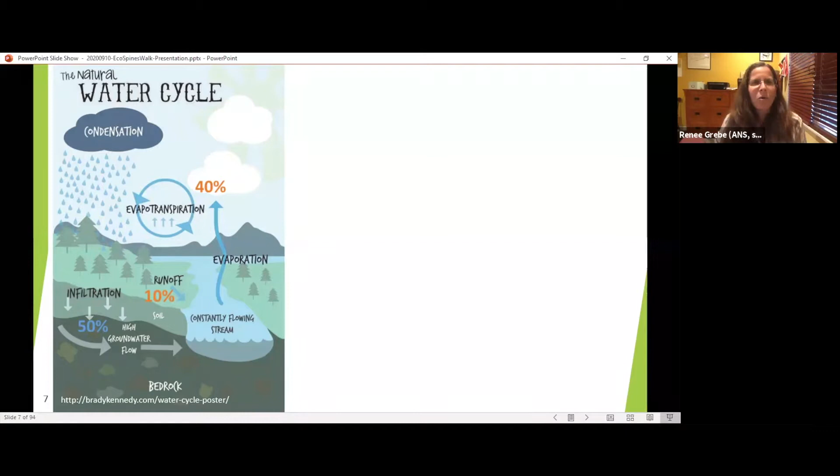So we'll dive right into why are we here. So when we think about where our water comes from, it's really interesting. Water really is what life is on our planet. And the water cycle here on the left really demonstrates how our water is recycled in our world. The land and water and air are all connected. The trees and natural vegetation prevent erosion and trap and filter that water to make it cleaner.

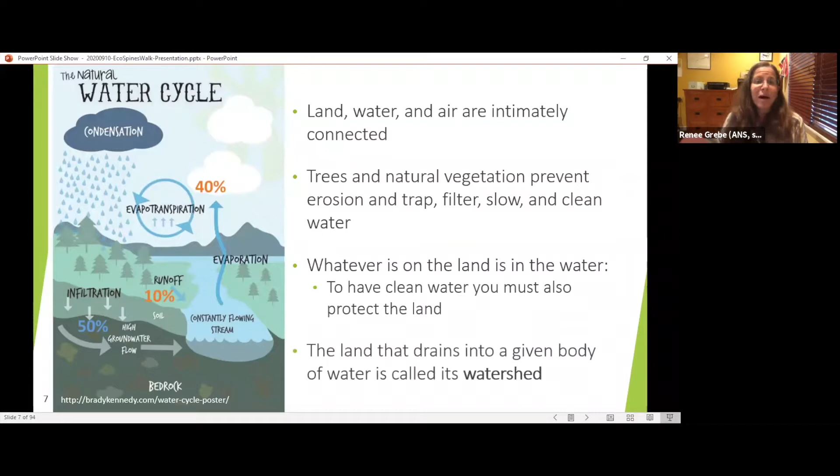And really whatever's on the land is in the water. So you have to have your protected lands in order to have really clean water. And then the land drains into a given body of water. That's called a watershed, and Charles will go into that in a little bit more detail. So we ourselves are made up of 60% water, and whatever's in the water is in us. So when our watersheds are healthier, our drinking water is healthier, and our communities are healthier.

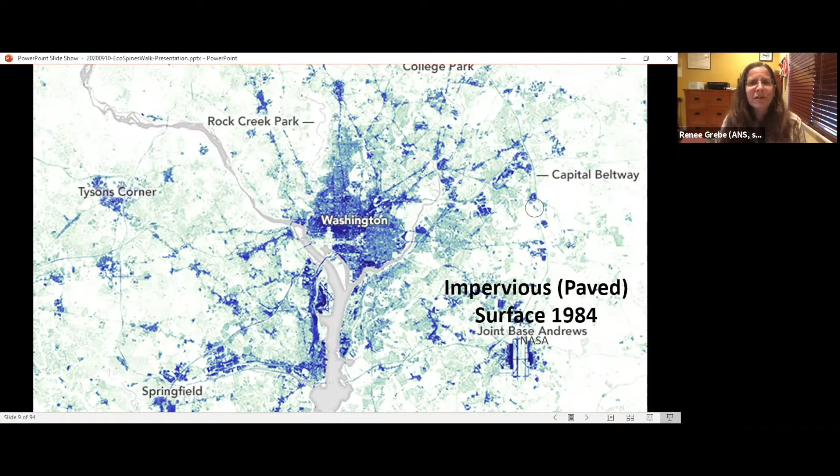When you think about where our water comes from today in urbanized areas, we have these two pictures, the impervious surface back in 1984 and the impervious surface in 2010. And I'll just flip back and forth between these two so you can see the difference in impervious surface. And you can see when we develop our land, like you can see up in the top right-hand corner, we have water runoff and stormwater issues.

I don't know how many of you got big storms today, but here in Alexandria, we got almost 3 inches of rain in about an hour's time. It was really impressive. So it's a good day to have a stormwater talk.

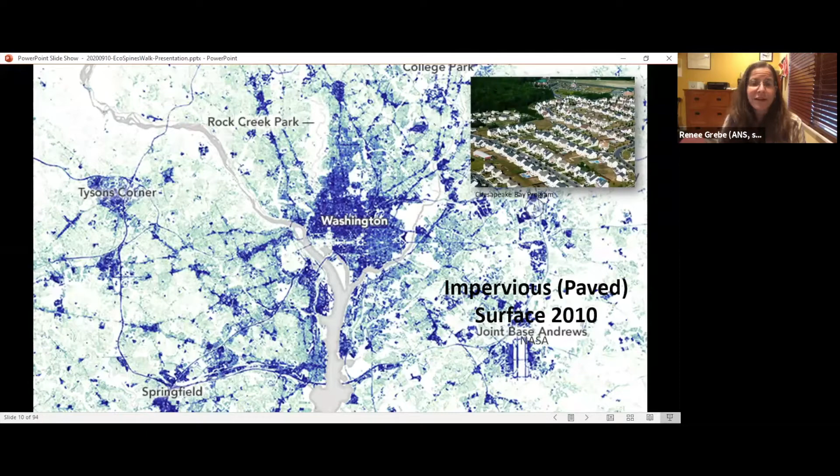So besides water, what else gets washed into streams? All of the things on our land go into our water. So the salt we put down in the winter, the fertilizers on our lawns, the dog waste that maybe people forget to pick up, chemicals, trash. And what does that mean?

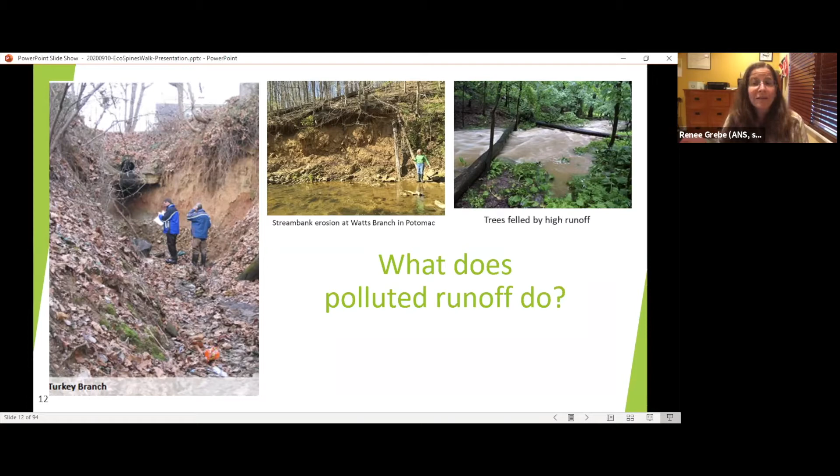When all this polluted runoff goes into our streams, where does it go? It goes into our water sources, our drinking water sources. It scours out some of our streams at extreme forces, like when we get these 3-inch rainstorms in an hour, and it can fell trees along the watershed. So how can smart growth redevelopment help? I'll hand it over to Sonia to explain what smart growth is.

Great, thanks, Renee. So well-designed, compact, mixed-use development that is walkable, bikeable, and linked to transit are key components to smart growth. The Embark Richmond Highway plan envisions just that, with bus rapid transit connecting the Huntington Metro Station to Fort Belvoir and improved bicycle and pedestrian connections throughout the corridor.

Not only does this type of redevelopment help us meet the needs of our growing region with more housing near transit, it provides an opportunity to transform sprawling, impervious parking lots and shopping centers into something more sustainable and healthy. As these aging commercial corridors are redeveloped, they're built with updated stormwater controls, and in some cases add management controls where there are currently none at all.

Additionally, the Embark plan provides opportunities to create access to open space, parks, and trails that are currently lacking in the corridor, and will help reconnect communities to the outdoors. This encourages healthier lifestyles with more opportunities for outdoor recreation and exercise. And with this renewed access to nature, it can help to create new generations of environmental stewards. Okay, next, JoAnne.

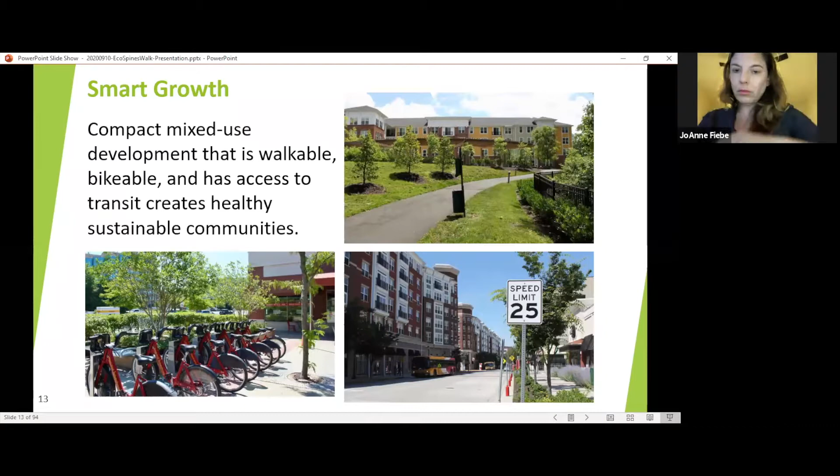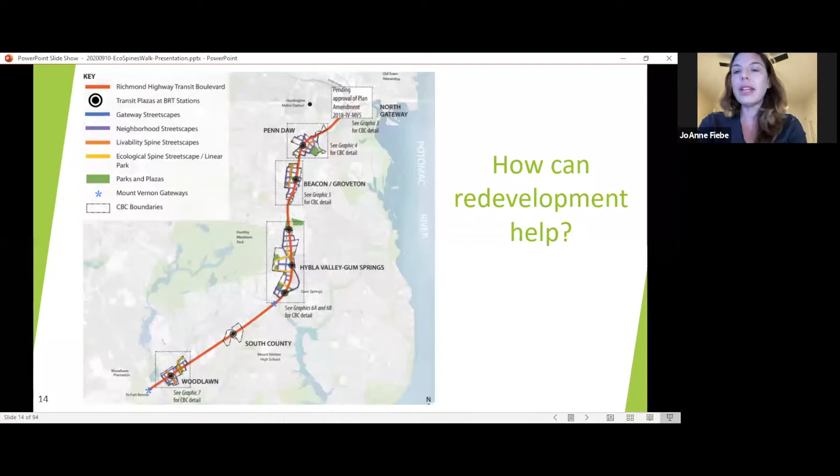Hi, so I hope that many of you are familiar with the Embark Richmond Highway plan, but it was a 2-year planning process to really think about the future of Richmond Highway and establish a new vision that focused on a lot of the elements that Sonia was speaking about. It was finished in 2018, so it utilized these smart growth principles to create a series of transit-oriented activity centers around these planned bus rapid transit stations.

So this is a map of the Embark area from North Gateway up by Interstate 495, and it goes all the way down to Woodlawn and right at the edge of Fort Belvoir. So you can see each of these black dots represents a BRT station. And so the idea is that there is a lot of energy and activity centers around these transit stations to concentrate that activity and to create these walkable environments.

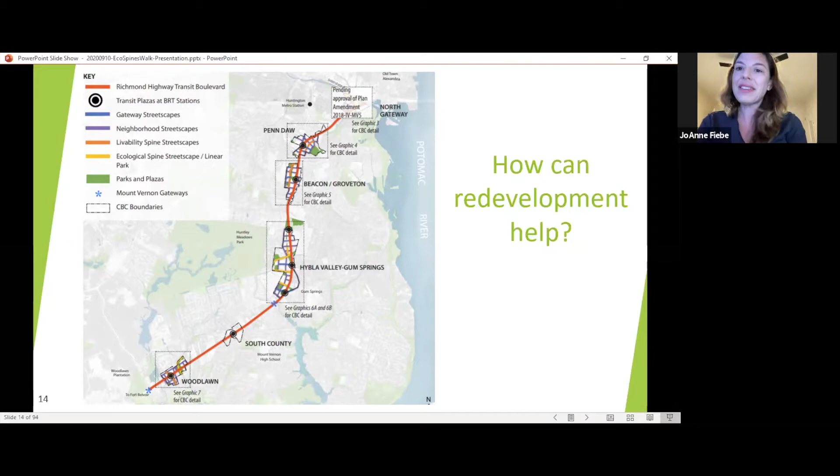So these little lines around the stations are the new grids of streets that connect communities into the BRT stations. So sometimes we call this a sort of string of pearls. Next slide. And this is the Beacon Groveton Community Business Center, which is an example of one of those transit-oriented activity centers. We call them community business centers.

But this is showing the current Beacon Mall on the left in that existing photo, and then how it will be transformed from an auto-dominated, mostly surface parking lot into a much more productive and healthy community by breaking down this large, massive shopping center into a series of more walkable blocks, and working with the existing street network, but augmenting it to create these communities.

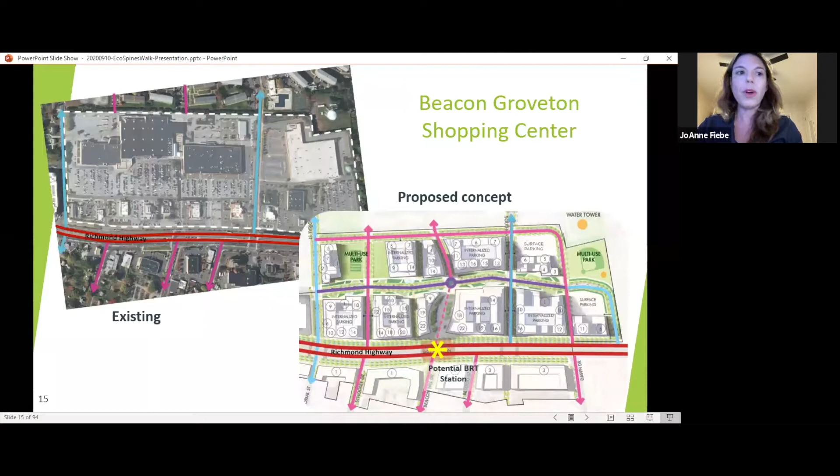And then it allows for opportunities for open space and for bike facilities and better mixed-use developments. And by doing this, we are able to concentrate growth in our activity centers in order to minimize pressure on the surrounding communities and open space, which helps support a lot of these ideas that we're going to talk about with stormwater. Go to the next slide.

And a good example of this, if you've all been to the Mosaic District at this point, is a similar idea that happened there, where they took an old movie theater and a large parking lot and transformed that with new streets and a mix of uses with a lot of new residences. So it's a good parallel.

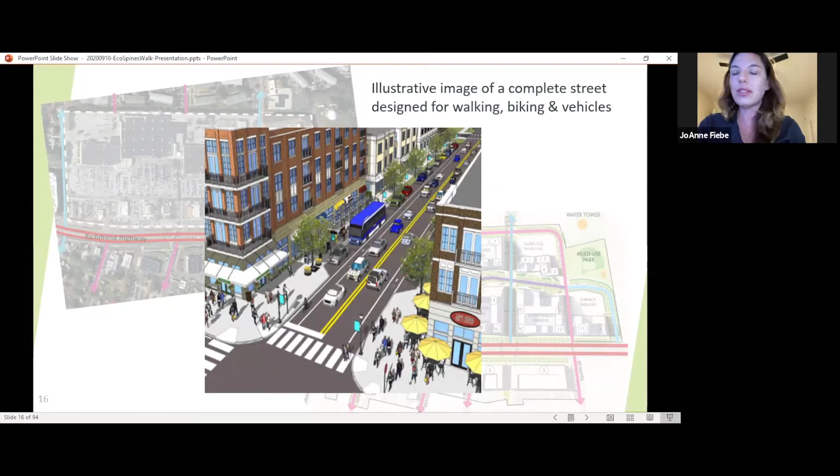This is just showing an example of the types of streets that we're hoping to create that are more walkable, bikeable, and bring buildings to the street edge to create that community experience. I'm good there.

Excellent. So what is a watershed? We'll hand it over to Charles. Okay. Thank you, JoAnne. So as JoAnne mentioned before, a watershed is an area that drains to a certain point. So if you picture a bathtub, that's pretty much what a watershed looks like. It has a drain at the end or a flow point, and it's all the land area that drains to that point. So whatever falls in that watershed often determines the condition, and of course what's built in that watershed determines the condition.

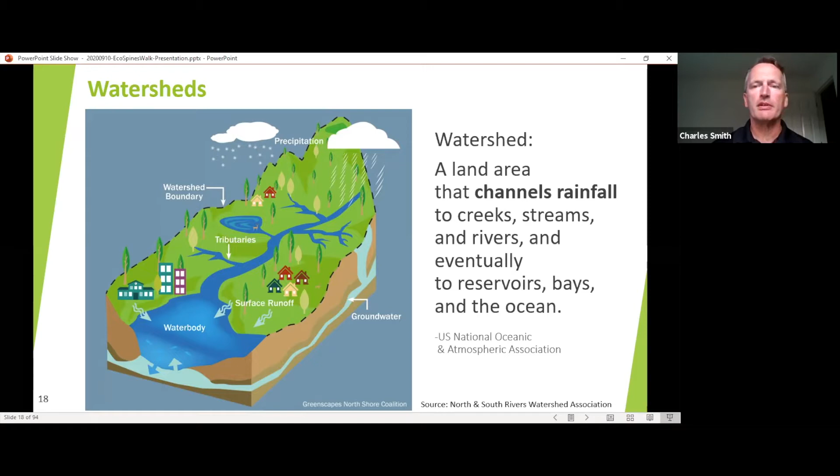So what's most important within the watershed is really what's been done with the land. If you have an undeveloped watershed, the thing to remember is that water can soak in. The natural vegetation can soak the water up, slow it down, recharge groundwater, and provide a clean, cold base flow to the streams. The water doesn't move quickly through that system. Plus, that water is available for the native vegetation and all the organisms that depend upon it.

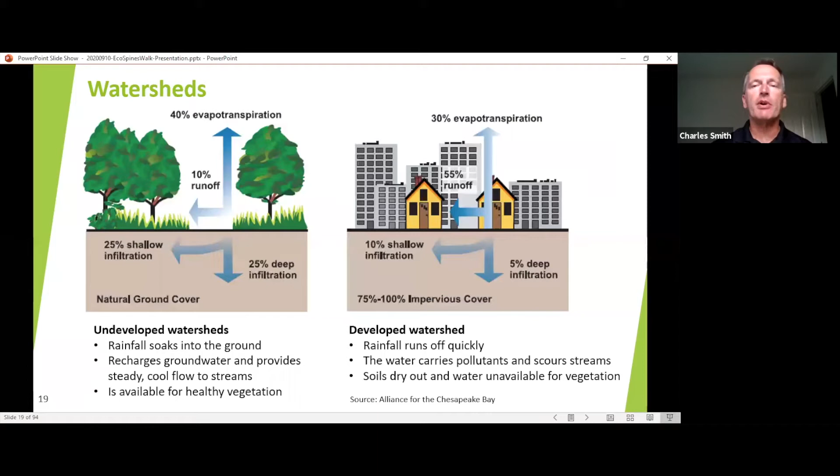But as soon as you begin to develop the watershed, as little as 5% imperviousness can begin to alter the receiving streams, and the more developed the area, the less water that's conserved. It flushes off very quickly. It's hot, it's dirty, and it also can erode the streams. And it's not available for the vegetation and the animals that need it. As JoAnne already mentioned, the pollutants that come with this runoff are pretty significant, and they increase with the types of land uses from residential to commercial, and that can have a big impact on the quality of the water.

So the thing that's really important, and I think the ecospines concept is really building upon this, is buffers. Because what we do know is that buffers provide tremendous benefits. Not only do they protect the banks of the stream and prevent erosion, but they also capture the pollutants and control flooding. Traditionally floodplains are along lower gradient streams. Those are streams that are more in the bottomlands off the hillsides, and they usually have floodplains where that water can spread out and slow down. There's also a lot of wildlife habitat, air quality, and quality of life benefits for humans.

And I think restoring those buffers provides many restored benefits, which we can really gain from, especially in the district we're talking about. One real quick thing too: 35-foot buffers are the minimum buffers usually required for RPAs, or resource protection areas, near streams in Virginia. 100-foot buffers are preferred, but recent research has shown that buffers that are 55 meters, or about 180 feet, are actually the most useful buffers from a resource and ecosystem function perspective.

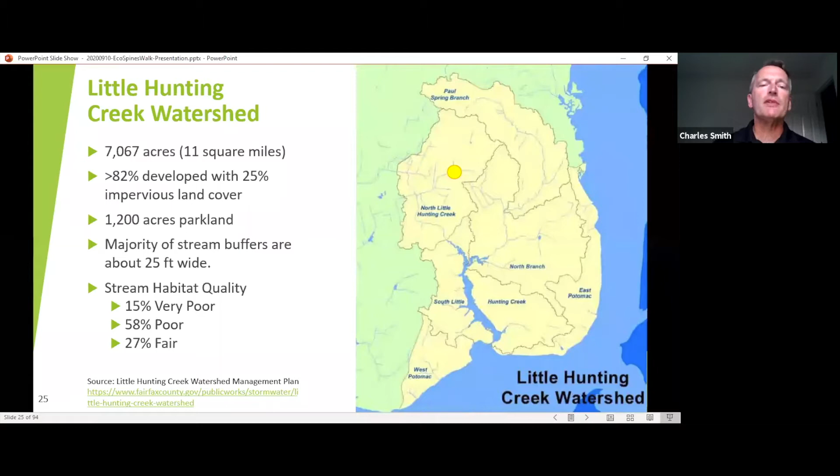So you can see the statistics on the watershed in terms of the area it drains. And then it is very developed, so about 25% imperviousness on the land cover on average. And that's significant because of a lot of runoff. And then those buffers are only about 25 feet wide, so that's also a significant issue, having very narrow buffers. And you can see that the vast majority of the streams in this region are fair to very poor because of that runoff primarily.

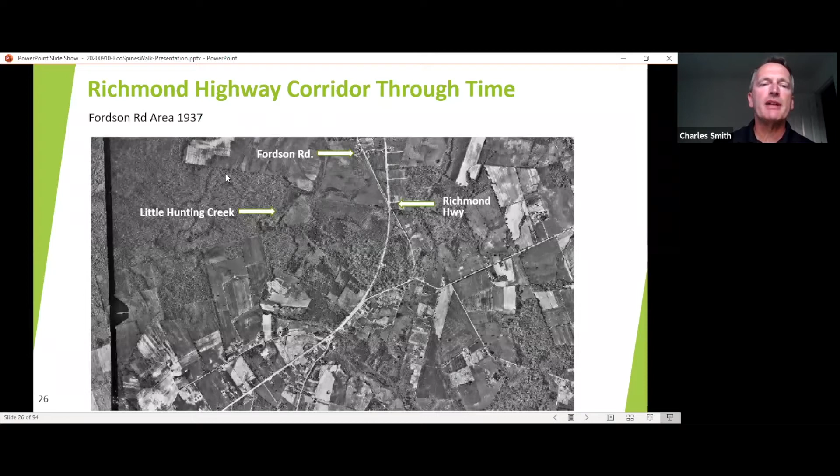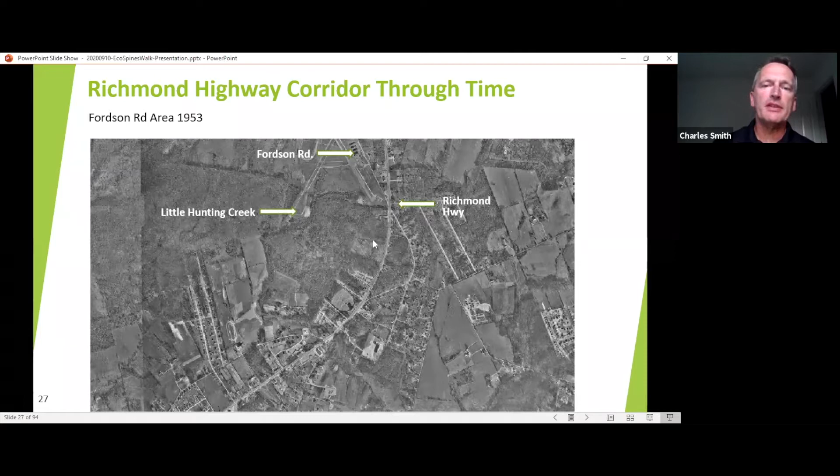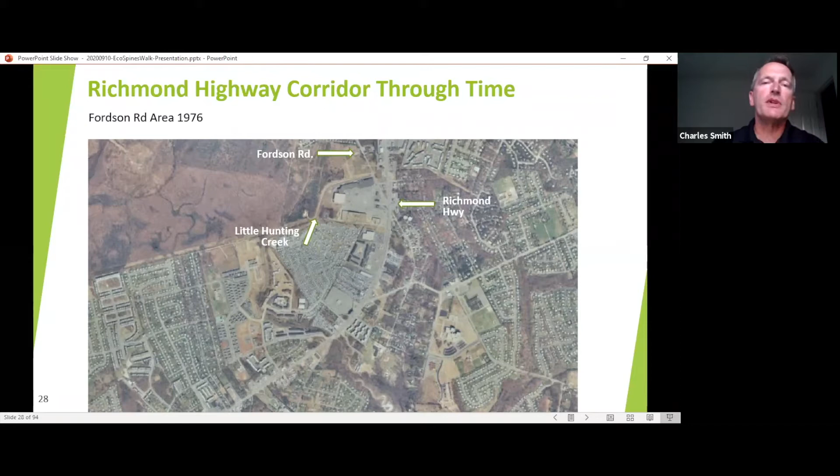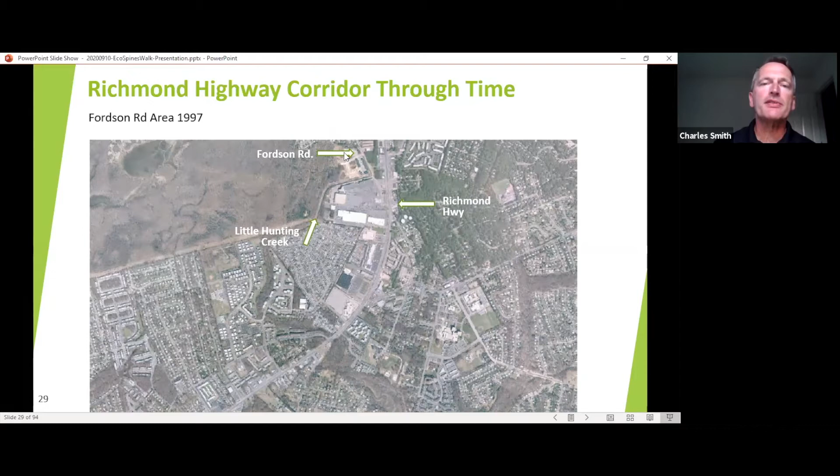So we lost our bed and bank stream. We went to a concrete ditch system. So this was in the era when stormwater was treated just to get rid of it. We basically wanted to get it off the land as quickly as possible. And then there's not a lot of change between 1976 and 1997. You have mostly build out. You can see the townhouses here at Fordson next to Mount Vernon Plaza under construction.

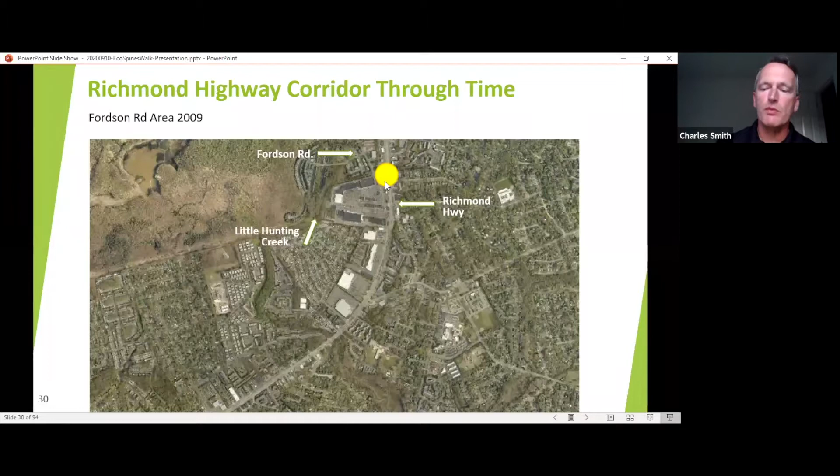And then by 2009, we've reached the final build out for what we see today in terms of the land cover area. You can still see Little Hunting Creek snaking around through here and then coming out down on this lower portion around Route 1. And then today we'll be talking about this area right here. Little Hunting Creek comes across Fordson from Route 1. That's going to be a focal point for our discussions. And there's a close-up of that.

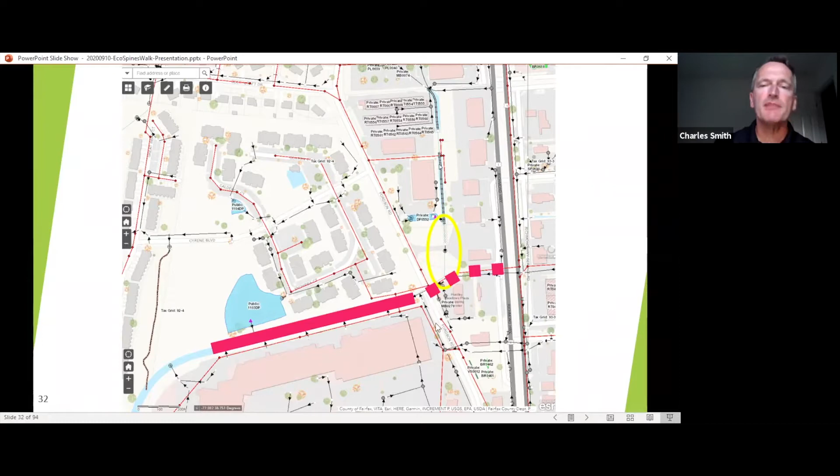And then you can see here the infrastructure. So this is the sewer system, the sanitary sewer system. This is one of the only ponds in this drainage area. So it's taking the water from this townhouse complex and leading up to the stream. But you can kind of see the infrastructure is pretty intensive around the stream itself.

And the last image I'm going to talk about right now is the resource protection area. So in Fairfax County, we have a Chesapeake Bay ordinance. So we have resource protection areas around all perennial streams. Those resource protection areas are 100 feet wide, or in a major floodplain, the limits of the floodplain itself, which could be much wider than 100 feet. And major floodplains are areas that have drainage of 360 acres or greater.

So this is just a quick snapshot showing that if this was not a developed area, you would not be able to build in these areas that are now hatched today. So development in the Route 1 corridor would look vastly different if the Chesapeake Bay Ordinance had existed back in the 50s to 70s when all this stuff happened.

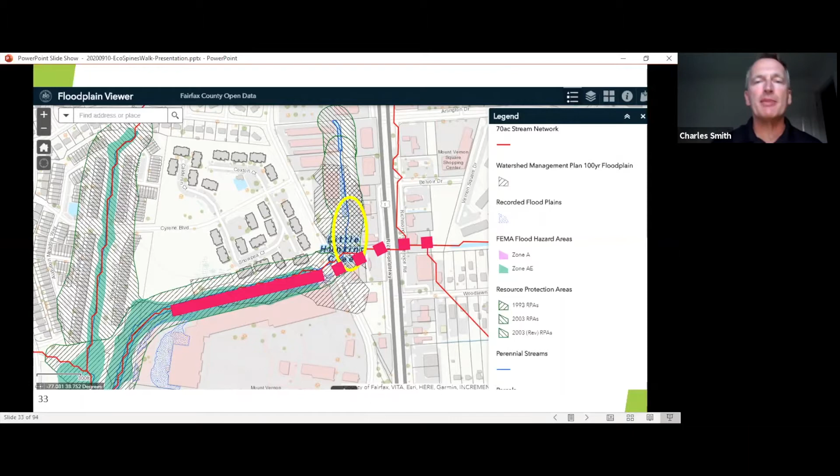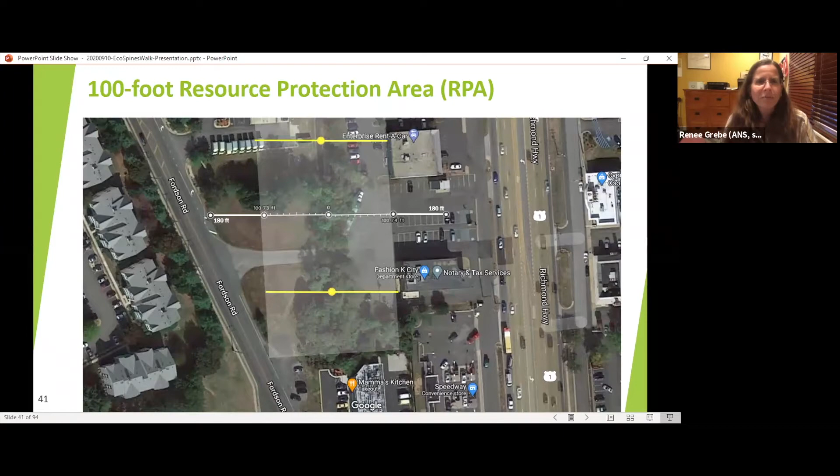In Google Maps, measuring the distance of the crowns of the trees there, it's about 70 foot or so, a little bit more narrow at points. That's not the spread of the creek, obviously, but it's the spread of the crowns of the trees there. We're standing 100 feet off of the stream bank right here at the edge of the RPA that would be planned. And here's a video of them standing and showing how far away that 100-foot buffer really was.

And thinking about it from the other side, from the parking lot side, we'll take a look from there as well. So we're here in between Fordson and Route 1, which we're looking at. And we have Charles, who has paced off the 100-foot marker of the resource protection area. So you can see that in today's development, it's a big impervious surface, and there where the trees are is the stream.

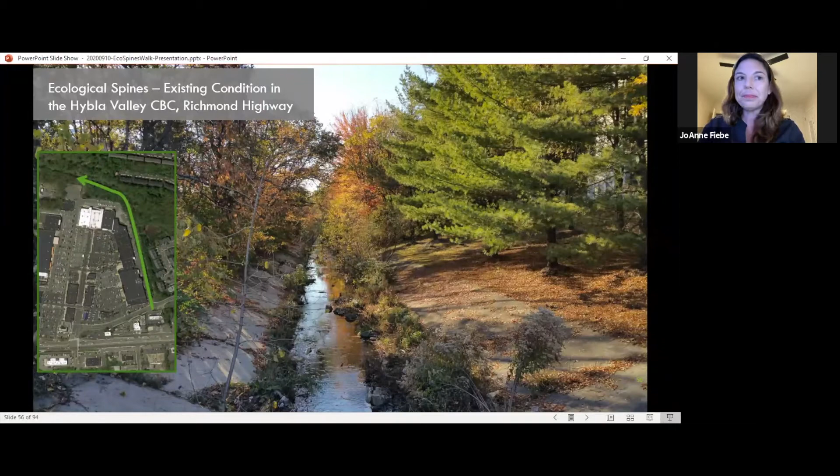You can go to the next slide.

Just to define what we're talking about, because it's kind of a wonky term, Fairfax County has completed a lot of restoration projects around the county in Tysons, in McLean, and even a portion of Dogue Creek near Hayfield and Telegraph Road. But ecological spines take this idea a step further by combining stream improvements with a new community amenity. We hope this idea maybe starts on Richmond Highway but can be used as inspiration elsewhere. So to define them, ecological spines are linear parks and enhanced riparian corridors where there are already existing streams, formed by daylighting buried streams or enhancing existing open swales. They serve a range of environmental, recreational, and educational purposes while connecting people to nature. The key to these is restoring a connected ecological system.

You can go to the next slide.

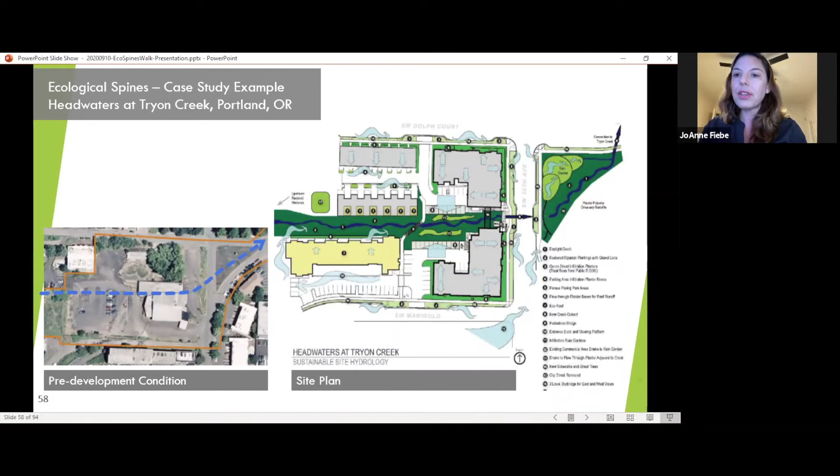What we're going to get in the reality of developing in these areas is that when you saw how wide that buffer was, it took up the entire block almost. There was really very little to develop. So it's highly unrealistic to expect that 100-foot buffer.

In fact, the Chesapeake Bay opens the door to looking at how, where development has already occurred, you can continue to develop in those areas. So what we're looking at is how can we allow development to occur within that buffer, but also do it in a way that's restoring some ecological function.

This is an example of that sort of very constrained cross-section of an ecological spine, where it's still quite narrow and buildings are pretty close to the waterway. But restoring those banks and creating riparian corridors along them, you can restore some of that environmental function, and sometimes some stormwater benefit as well.

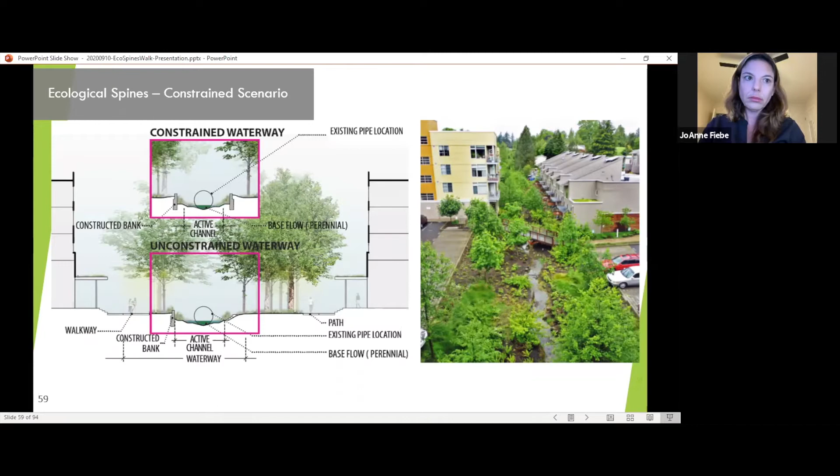So your paths would actually be part of a floodplain. During higher flow events, those would be underwater and not usable all the time. That's important because you have to give that flood an opportunity to spread out and slow down, and that gives better flood control and better cleaning of that water during higher flow events.

This shows an example of when you have the opportunity to gain some more space and it's a little less constrained—what can you do there? As Charles was mentioning about the banks, the entire waterway area is much wider here and allows the water to spread out even further. It really just depends on the specific conditions of each ecological spine and understanding what can be achieved.

But all of the amenities that go alongside these, you can see as an example in the photo on the right—not only are we restoring that floodplain function and these natural banks, but we're adding things like trails and opportunities for people to connect with that waterway.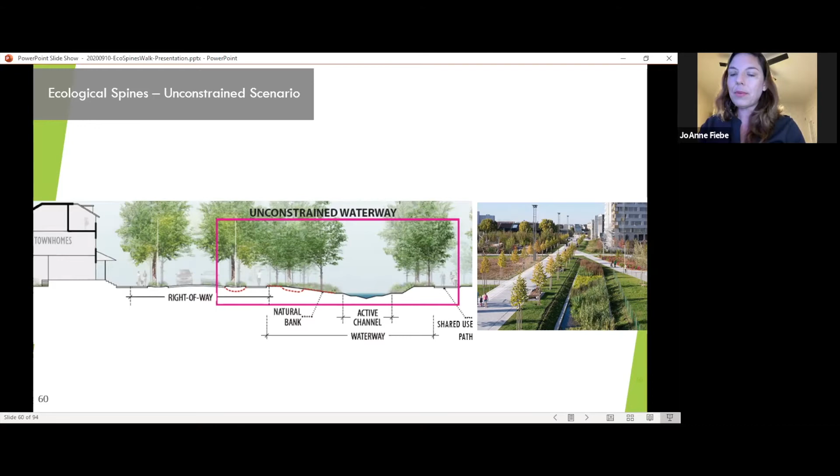This might be an example of a completely naturalized scenario. An example might be up by Cameron Run, all the way up in North Gateway, where Cameron Run is fairly wide, and there are opportunities to restore a lot of that natural bank along that edge.

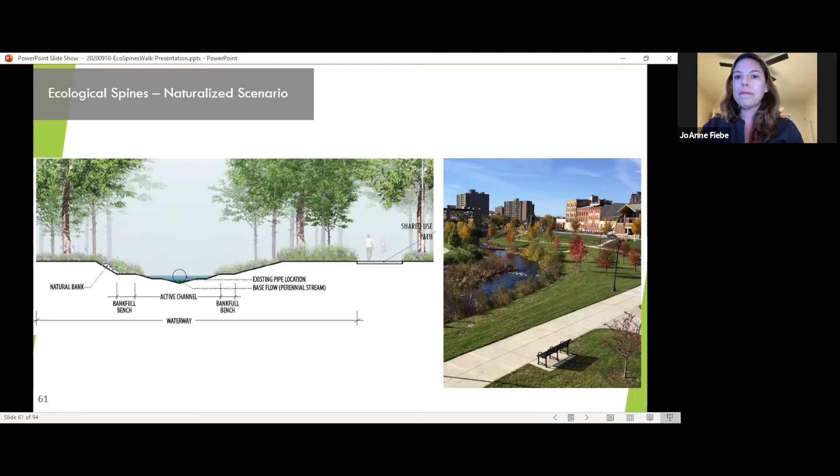These would be much wider and restore a lot more floodplain function, with maybe much more naturalized experiences where there could be trails and things in there, but less programming, less intense—looking especially at the waterway's edge and how to restore that natural edge.

These show some examples of other ecological spine type projects around the country where they've created different experiences along these—things like ways to get down and touch the water. We were looking out when we were walking by the Hybla Valley Shopping Center, and in that space behind it there were children playing back there.

You could imagine right now, with the high banks and concrete channels, parents would say stay away from that. It would be really nice if kids could actually engage with the water—maybe they bring their fishing nets and things like that. This is all about creating those amenities.

We've done a lot of research work on how to implement these types of ecological spines, and we're going to continue to do that. We've developed a technical team of staff from everywhere from the planning side to stormwater experts to landscape architects to look at the different aspects of what's needed to design these.

But as I mentioned earlier, the need for a public-private partnership and some financial or technical support, as the Portland example illustrates, is going to probably be needed as well. And then there's important practical questions about how to daylight and restore streams that might have upstream or downstream impacts outside the boundaries of the site. So when you have one developer developing a section of an ecological spine, what does that do for upstream and downstream impacts? That's something the county is going to also have to participate in better understanding.

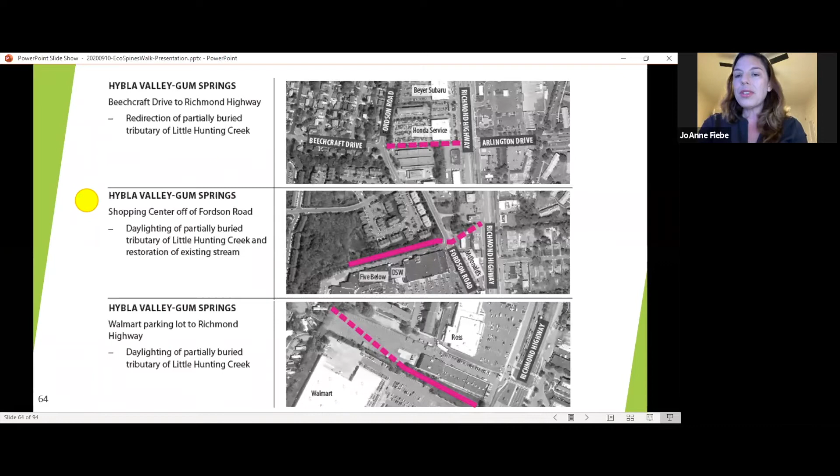This just shows a map of a few of the other locations besides the one we were talking about. As Charles was showing some of the other locations around Little Hunting Creek where it comes off, you can see that in all three of these examples. But in addition to these, we look at portions of Dogue Creek and portions of Cameron Run that have these same opportunities.

While we were out walking and taking some of these videos, Mama's Kitchen, that's right there on Fordson.

This is right at where we were initially looking at the full 100 feet of the RPA, and the stream comes down and then goes down under Fordson, and right there is where Mama's Kitchen is.

What's amazing here is, and what we want to talk a little bit about, is placemaking, where you really are able to utilize the local community's assets to create a sense of place with gathering areas that highlight the history or natural history of the area, providing opportunities for passive recreation that JoAnne was sharing. That basically helps to promote well-being and interest for the people who live, work, and play in this area.

The owners of this plaza utilized an undevelopable part of the property right next to the stream and created this gorgeous garden, growing fruits and vegetables that they use in the restaurant, providing a beautiful outdoor seating area just steps from the hustle and bustle of Richmond Highway. You wouldn't even know you were near the highway when you were in there. It was really quite remarkable. We were just amazed by what you can create when you start thinking about how can we create a sense of place here.

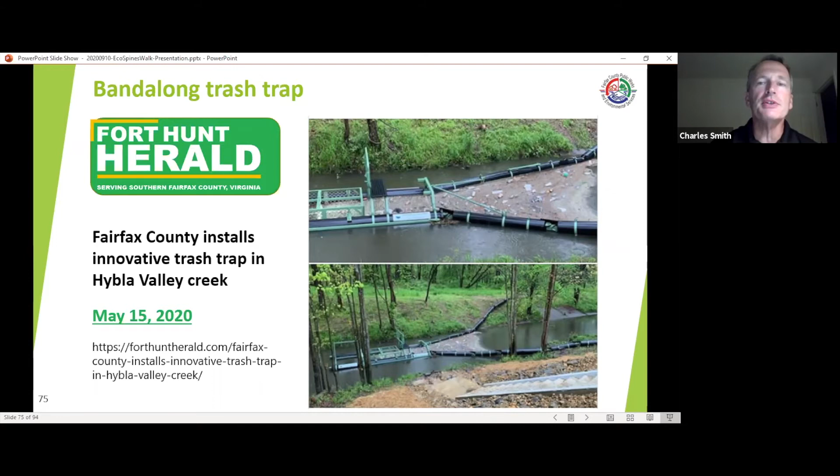Some of the things we're trying to do in the interim in this space - the county really tries to work closely with the Department of Planning and Development, JoAnne's group, and others to help plan the Richmond corridor improvements. But in the interim, since we don't have control of much of the land, we're trying to do some things to help the corridor. So this Bandalong trash collector is one effort, and we've had this in place since May. They exist in DC and also in Arlington County, so they're not new to the region, but it's a unique way to try to find a way to control trash.

It's located right here at the end of the concrete ditch that flows off of Fordson behind the area with the Home Depot. There's a picture of the end of the concrete ditch, and then it's anchored up on the banks. This is further along down Little Hunting Creek behind the Home Depot.

I'll let this one play first, two quick videos back to back here. Sorry, they're somehow getting out of order, one moment here.

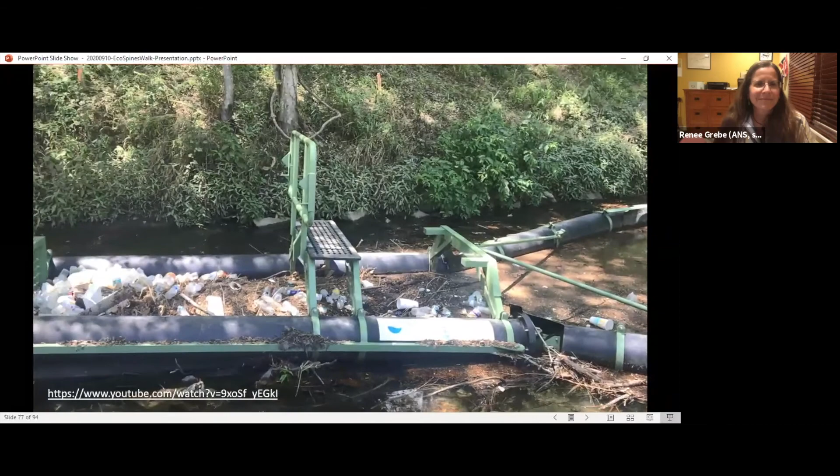This is further along down Little Hunting Creek behind the Home Depot along Route 1, where a new Bandalong trash collection system is here to try to minimize the trash pollution going into the Potomac River and downstream of Little Hunting Creek.

So this is further along down Little Hunting. This is just downstream of the Bandalong on Little Hunting Creek. And you can see how much less trash we have here. And you can see the Bandalong is right here. Great.

This is just downstream of the Bandalong on Little Hunting Creek. So the Bandalong is a unique opportunity to try to capture trash. I will throw in here right now, the Bandalong is not the end all and the be all. It is a good effort, but you've got folks like the Friends of Little Hunting Creek and the volunteers who have put in probably thousands of hours over the years, pulling out incredible quantities of trash from that stream. And so we're trying to reduce that load, but certainly the efforts of many people over many years have done a lot.

We have a lot to do with behavioral changes that will really help in terms of the trash issues also. One of the other efforts we've been undertaking in the last year is Operation Stream Shield. So this is an effort to try to take folks who are underemployed and help them. We'll do 2 things: help our environment, but also potentially give them experience and skill sets that might help them get employed. And as of May this year, they had removed over 17 tons of trash from our county streams. And they're also now controlling invasive species mostly on county land as part of stormwater projects and other projects.

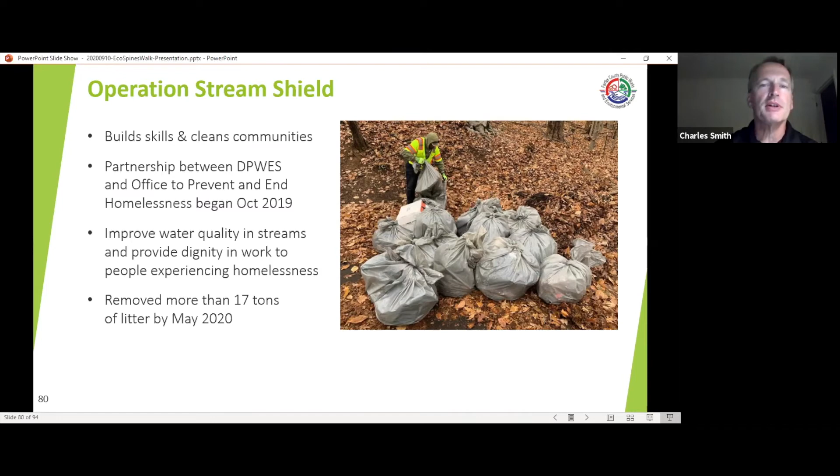And then some other things we do is I mentioned in the slide previously that there are over 6,000 stormwater facilities in the county. It's actually closer to 7,000, I think now, or 6,500. And a significant percentage of those are privately maintained. So the county has to inspect them once every 5 years, make sure they're functioning properly. And then if they're not, they issue a corrective action notice so that the owners are responsible for doing it. So a lot of those are maintained by private contractors. So we provide training to those contractors, and we have these fact sheets which allow them to better understand what is required to maintain the facility.

Another thing for all residents is that we do have a service request, both a number and a web page, where if there's an issue that you see, you can report it to us. We'll send our staff out to take a look at it. We'll try to take corrective action. We also have places to tell you how to get in contact with VDOT if it's more of a problem with a road right of way.

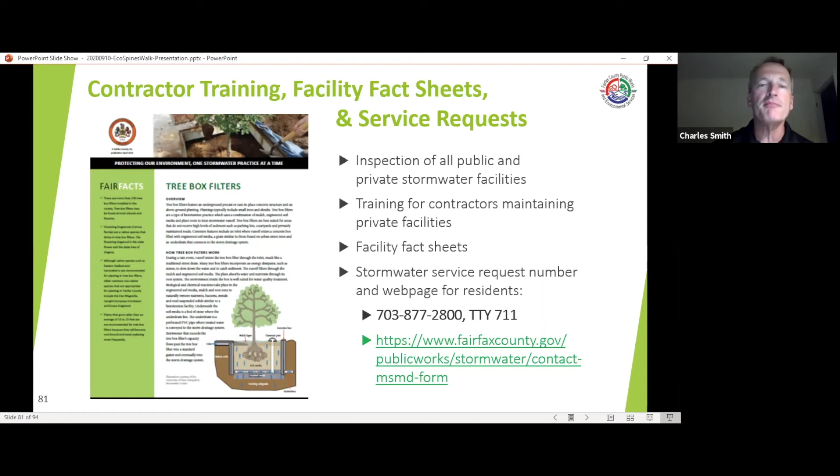Yeah, so Charles, let me add to some of this. This is a very interesting project. So when we started getting involved in the VDOT and county's widening project that's underway right now, as well as the new bus rapid transit project, and when we saw all of the stormwater facilities that were being planned, we said, boy, we have this ecological spine concept where we're saying we want to take existing stormwater facilities and turn them into community amenities while having better environmental functions. Could we not do the same for these stormwater ponds? And if you just flip back to the previous picture for a second, we looked at,

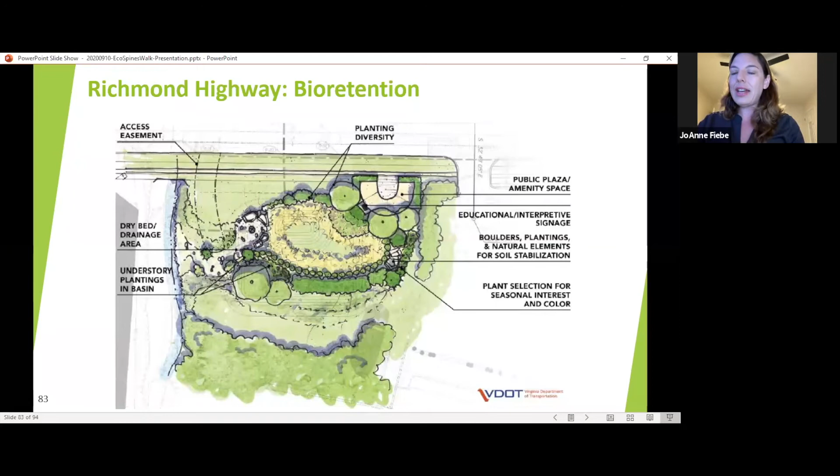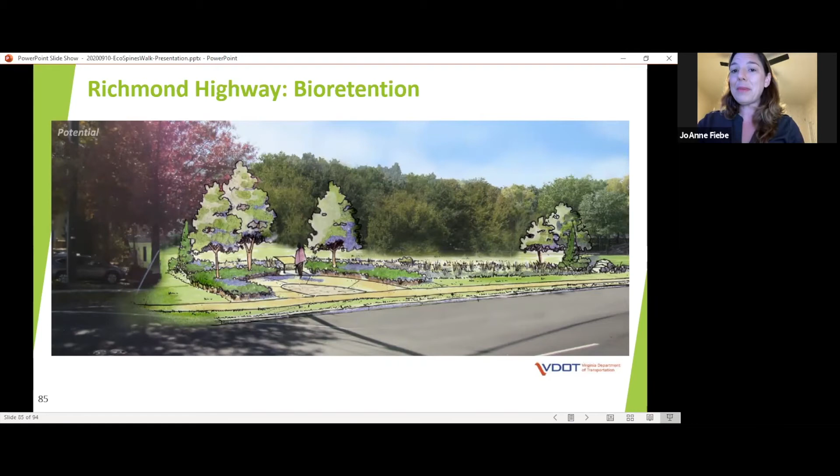So the next slide was showcasing where one of these ponds would be located. So you can envision, right, that's a perspective view of that pond from the highway and how it could be transformed. So there's two different types of ponds in the Richmond Highway Corridor. I call them ponds, but they're all stormwater facilities. One is a bioretention that doesn't hold water typically. It will collect the water and then drain away, usually, I believe, Charles, you can correct me, a couple days typically, if not sooner. Maybe a day; rain like today, it might take a little bit more time. And then the next slide.

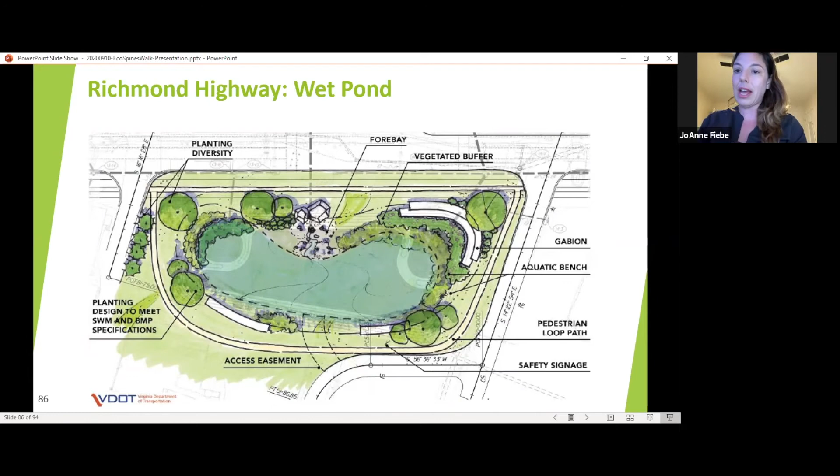So this example of a wet pond, there's only a couple of these as part of the VDOT project. They're usually more substantial in size, and they treat for both quantity and quality, where bioretention, I believe, focuses more on the quality piece. But here you can see elements, again, this sort of natural shape, which those Accotink ponds don't have. They're just big rectangles. Things like gabion walls to hold back parts of land and create different types of aquatic habitats around them. And then these trails and other features that really help to build a sense of place that we're talking a lot about.